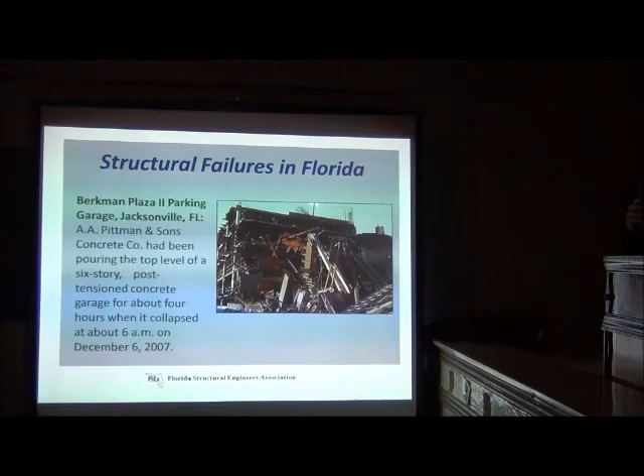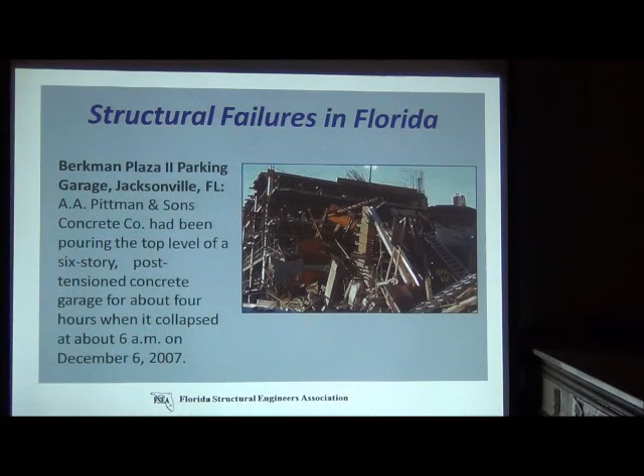All right, so let's talk about things that have not gone well. Here's what I was talking about earlier. There's Berkman Plaza in Jacksonville, Florida. I remember going into work one morning, listening to the news, and this thing's about a half mile from my office. As soon as I heard about it, I was like, oh my God. So I took a walk over and got to some places where I could get close, but not being search and rescue certified, I obviously wasn't able to go in there, nor would I have wanted to, but just to see the equipment and cranes and people and dogs and whatever they could do to try to get people out of there.

And I think there were 10 or 15 people trapped, and they eventually got them all out except for the one, Willie Edwards, I told you about earlier. But that's been going on since 2007. So that's the most recent example.

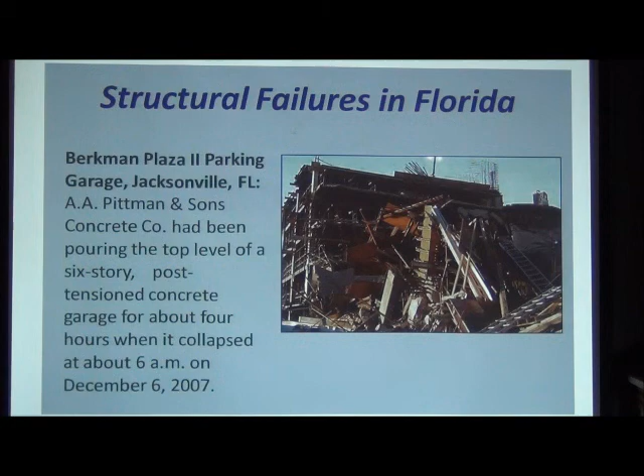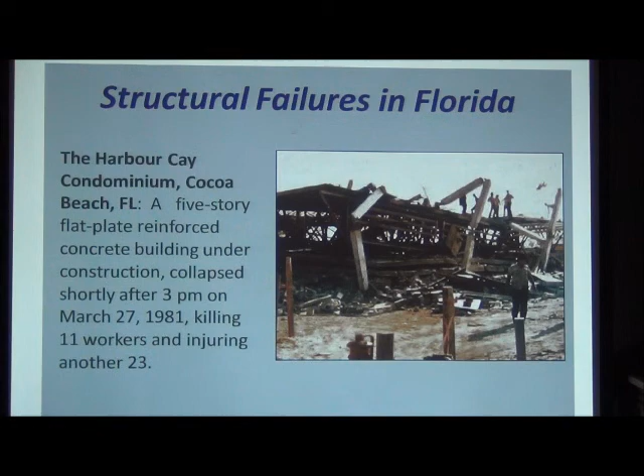Back in the early 80s, there was the Harbour Cay condominium in Cocoa Beach, which many of you may remember. It was a flat plate reinforced concrete building structure designed by an engineer who used to work for NASA, who came in because of the downturn in the economy at NASA. People who work at NASA are bright people. He read the building codes. He did the analysis. He thought he understood it well enough, except that there was a concept that he didn't quite grasp, and that's two-way shear. He didn't get the two-way punching shear right, and that's what happens here. And it wasn't because he tried to do something incorrectly. He didn't know basically what he didn't know.

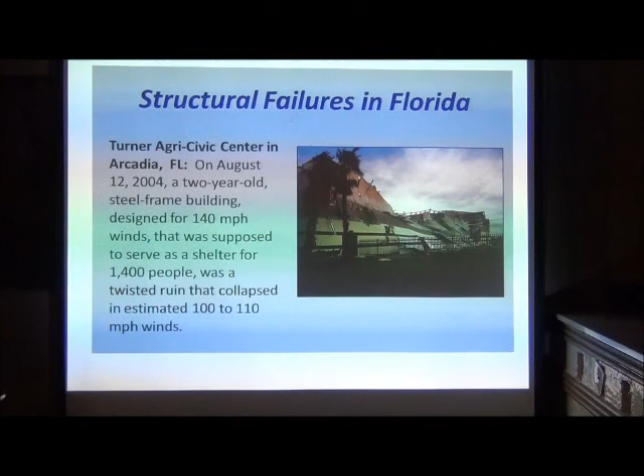All right. There's the Turner Agri-Civic Center. It was supposed to be designed for 140-mile-an-hour wind, and it actually ended up twisting into a collapse with winds that were much lower than the design loads. Imagine if it had been used at the time.

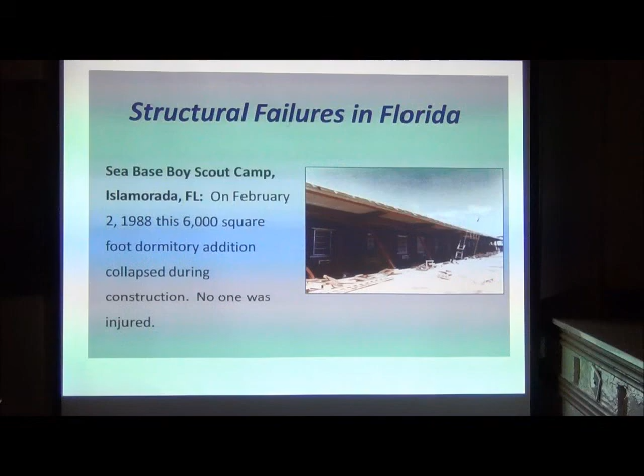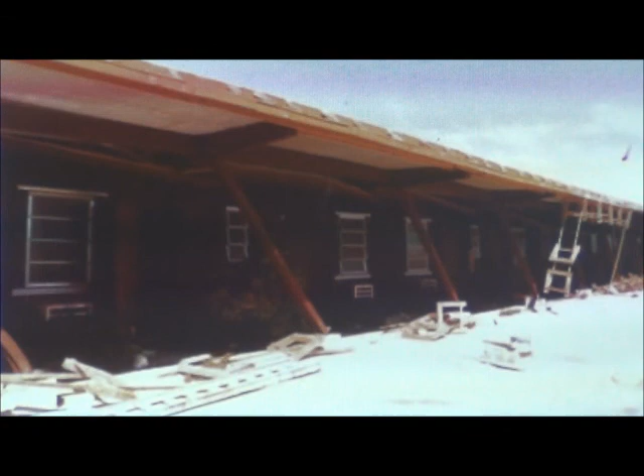And then this is kind of a smaller one, the Sea Base Boy Scout Camp. It's really not clear in the photos, but these columns are actually supposed to be vertical, so that roof that cantilevered out there is kind of leaning down. It took me several tries looking at the photographs to realize that's what had happened there. Fortunately, nobody there was injured. So we don't have a lot of...

Yes, sir. The one in Cocoa Beach, I was under the impression that it had to do with shoring and reshoring. No, that's not the case. That's not the case. Okay.

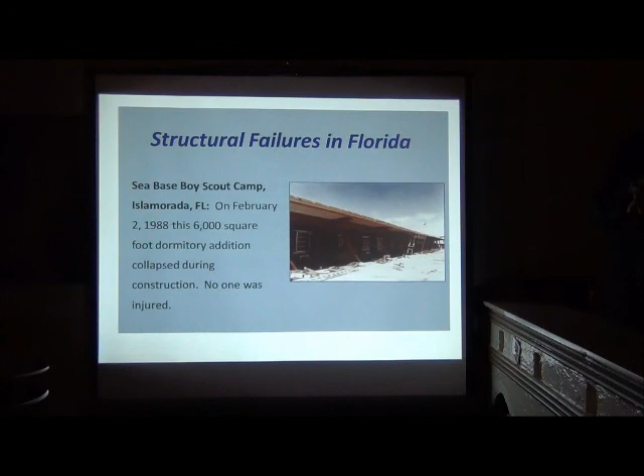Now, with the Berkman Plaza, there was also some shoring and reshoring stuff that was done incorrectly. Okay, that probably caused the collapse to occur the day that it did. It hasn't been publicly announced, I just happen to know engineers, so you didn't hear this from me. But what they also found is that the overstress in some of the elements was such that over time this collapse would have occurred, and you can almost say it was a blessing that it occurred under construction, because one person died and not a bunch of people after they were living there. I don't know where there's a good answer in any of that.

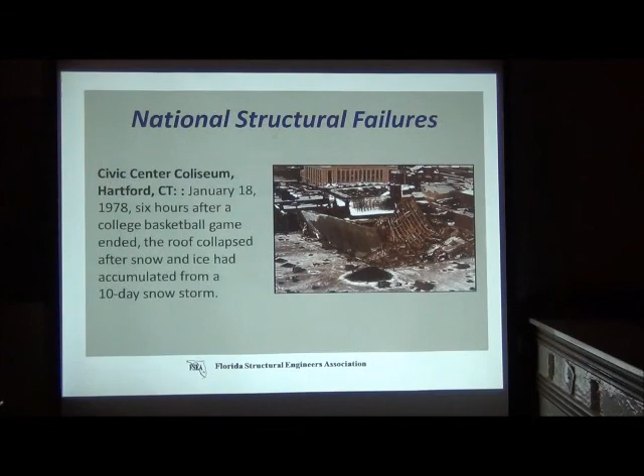If you look at the national level, you guys probably remember the Hartford Civic Center. There was a whole bunch of people in there for a college basketball game. Literally within hours after them having left, the roof collapsed. So just imagine a couple hours earlier. Okay, 10-day snowstorm. The Hyatt Regency, anybody not remember this? I mean, this was just a very, very painful thing to watch. It happened right after I graduated from college. But,

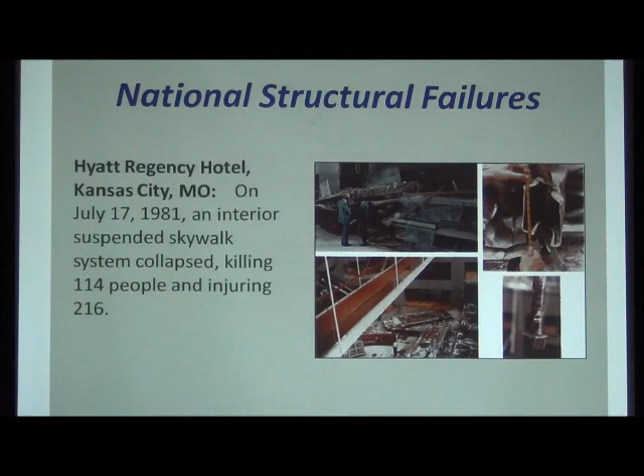these are people trying to make good decisions under the pressures of building stuff. I mean, we go through this all the time. Nobody did this on purpose. Jack Gillum was the engineer. I mean, just an awful thing to think that he was responsible for 115 or 114 people not being alive.

So a lot of people are like, well, yeah, but that's 4 buildings, and what's the span of that? 30 years that I just showed you, right? So what, people have to be dead before we do something about it? I mean, that's literally what happens in some of the conversations. We need to be counting bodies before it makes a difference. I don't think that's where we want to be as a profession. So that's one of the reasons I'm really passionate about this, okay? And I hope that when you walk out of here, you feel about it the same way I do. Nobody should not be able to go home to their families at night because of something any one of us did as a structural engineer. We just can't allow it as a profession, okay? And the only people who are going to beat that horn is us, and we can get people to support us.